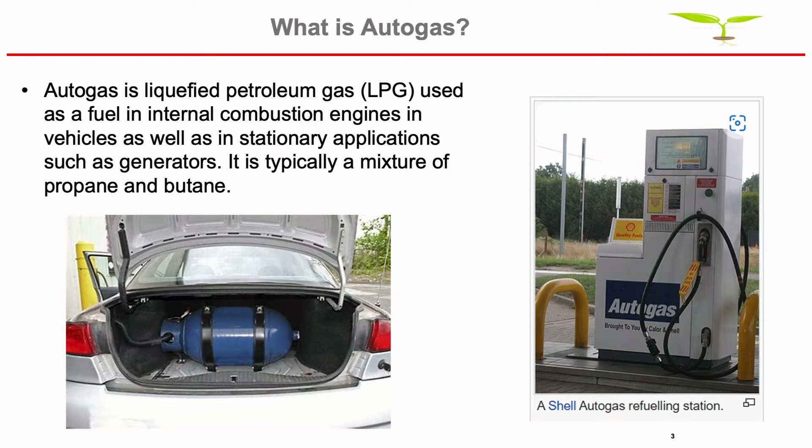It's not autogas. Autogas is simply use of LPG, no matter the ratio, whether it's 100% butane, 100% propane, or some mix, it doesn't really matter. The important thing is that you're using LPG as your automotive fuel. In Nigeria here, I think our spec is 70-30. So that's 70% butane, 30% propane max. Although I know there's quite a bit of violation around, people are not following that prescription. Next slide, please.

In Nigeria here, we have a very peculiar situation. We haven't quite gone the autogas way. So there is a bit more CNG dispensing infrastructure than autogas, and I will speak to that. Next slide, please. So I did say that the share of autogas in the transportation fuel mix is rapidly growing.

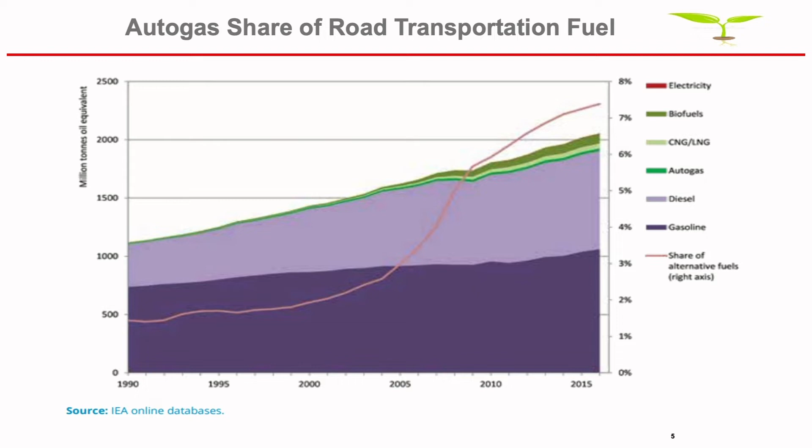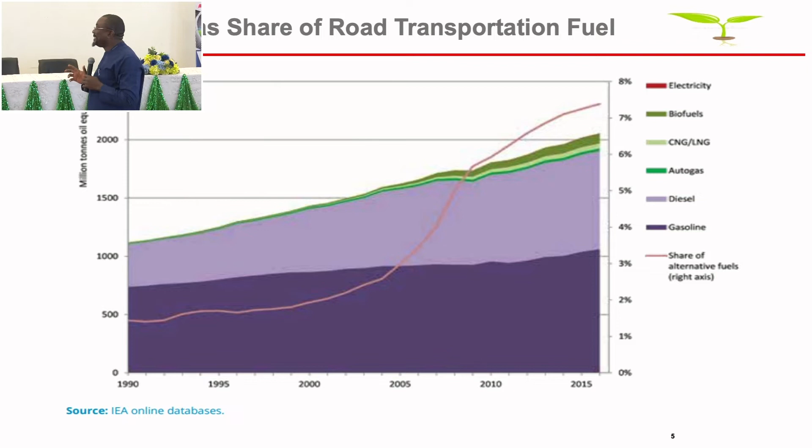If you look at that red line, that's what it shows. You can see that electric vehicles don't quite show, because there's so much talk about EVs, right? The adoption rate is still... the share of alternative fuels was about 7.5% globally in the entire mix. And it's grown faster than what is shown here. So the question is, should we get on it or should we wait, right? But I will show the reasons why we need to move on.

Next slide, please. So why should we adopt in Nigeria? Our gas is rich. Everybody understands what a rich gas is. So wet rich gas is available locally. The subsidies on petrol are becoming clearly unsustainable. The only way to reduce subsidies really and make the pain minimal is to gradually switch from PMS to some gas, whether it's CNG or autogas. Any other step you take will have a huge shock on the system.

So our expectation is that the Nigerian gas expansion program will drive a gradual transition from PMS to autogas, at least in the near term, to not just reduce the subsidy, but to minimize the shock, the impact a complete deregulation of the sector will have on the economy. It is very key that we do that.

The PMS supply and distribution challenges we face, if you think about Abuja in the last couple of months, think of Lagos today, we do have scarcity, right? And it is because we are hugely dependent on PMS. So when there is a shock or a break in that transmission, we feel it so much. Now, if you flip the coin and assume you had a 50-50 split between autogas and PMS, we would not see the queues we see today.

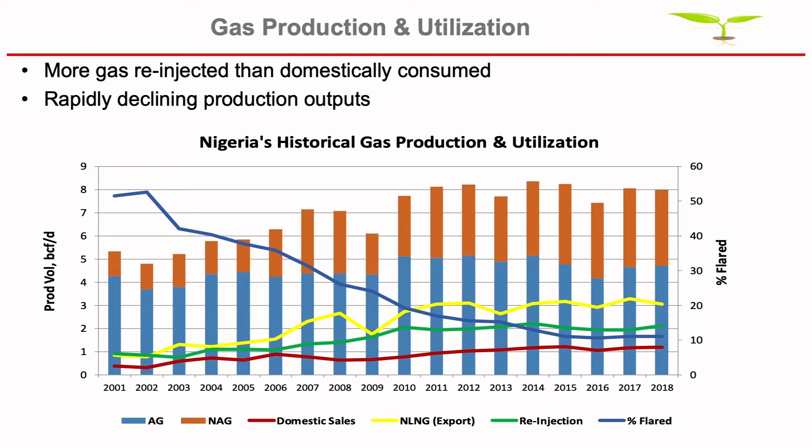And I tell you what, pipeline quality gas is not supposed to be liquids rich, because that creates flow assurance issues in the pipeline. We load up the lines with liquids. So that has a significant cost to our operations as well. So there's a whole lot that can be done to take advantage of this resource base and relieve us from depending so much on PMS. Next slide, please.

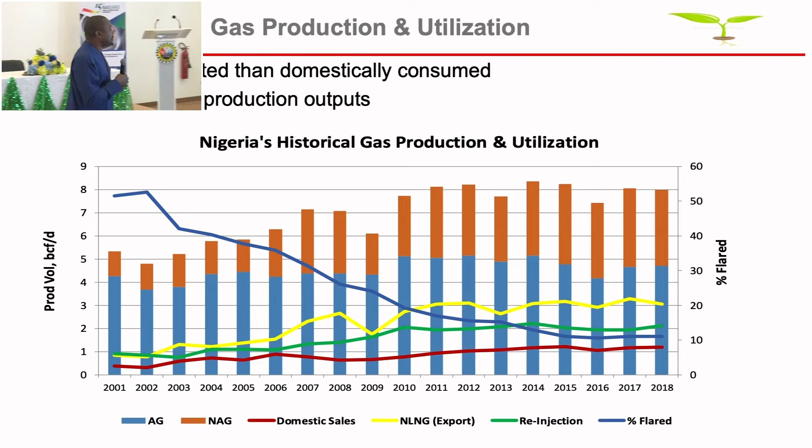So what's the supply situation? Today, we're doing probably 50-50. If you look at the average since 2021, it's about a 50-50 split between imported and locally produced. Right now we get about 350,000 metric tons from NLNG. And then the other ones are small producers. The BRT NGL produces, Greenville does some. The PNG, NPDC Oredo does. I think Zenergy does as well, but they are very small contributors to the mix.

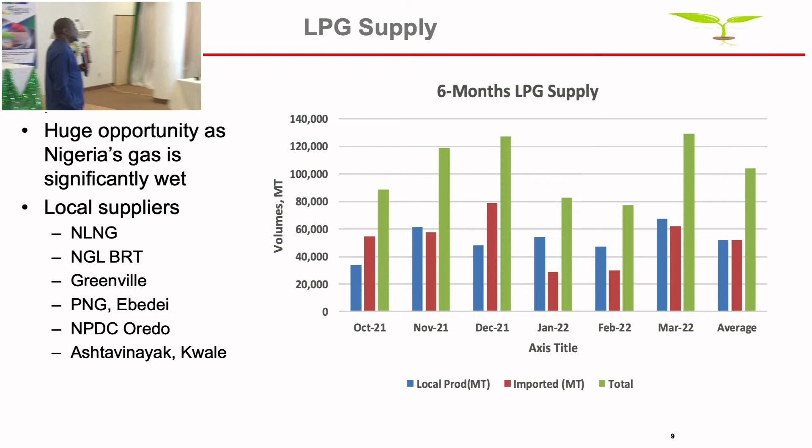Okay. I've been told about time, I think it's Prof that caused it. Shouldn't walk in and cut my time.

Okay, so the important thing is there's opportunity here to increase local production, and that will help as we go through the adoption. Next slide, please.

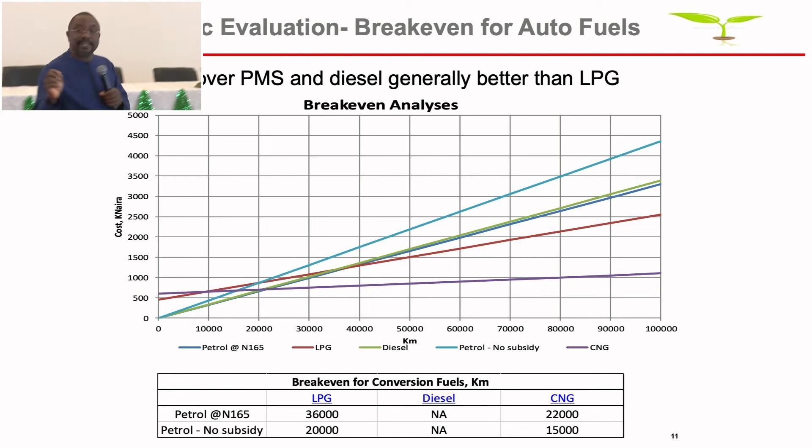Next, please. So these are the numbers. So if you look at this, I'm using the break-even distance. Clearly, CNG gives you a better break-even distance over LPG and PMS, but LPG gives you far better, even better than subsidized petrol and unsubsidized petrol. So there's a clear advantage in switching from PMS to LPG, and if you can, to CNG, the advantage is even more, right? But like I said, the CNG distribution infrastructure is at its infancy. So if we're in a hurry as a country, we need to switch quickly to LPG, right? That's your fastest way to reduce your fuel importation volumes.

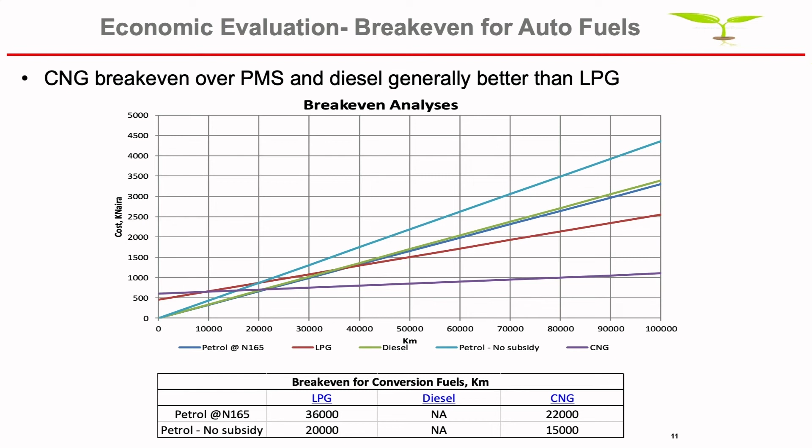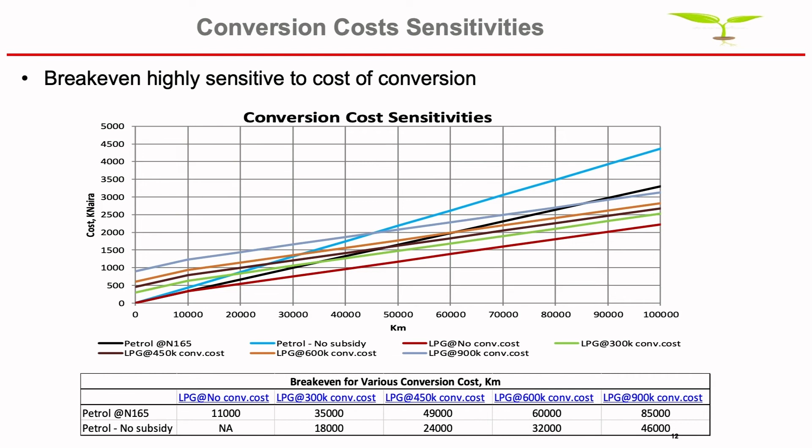Next slide, please. So I looked at conversion cost sensitivities. Right now, the NGEP, they are charging about 300K per conversion. And this is normal vehicles, right? If you did 300K, you're looking at 35,000 kilometers. That's if you're looking at regulated fuel price at 165. Now, if you look at the fuel without subsidy, it's only about 18,000 kilometers. So there's an advantage there.

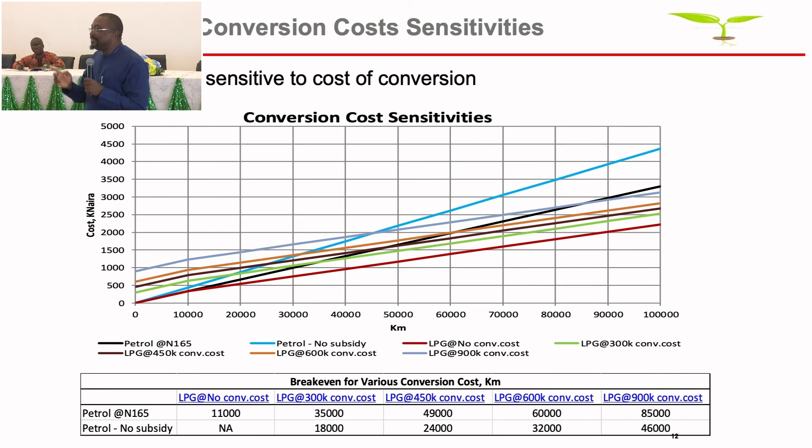So one message this tells you is that the subsidy regime, the regulated price regime, is a disincentive to conversion, right? So if we intend to make conversion attractive, we actually need to deregulate fuel prices. So that's an important message there. Okay, next please. My time is almost done.

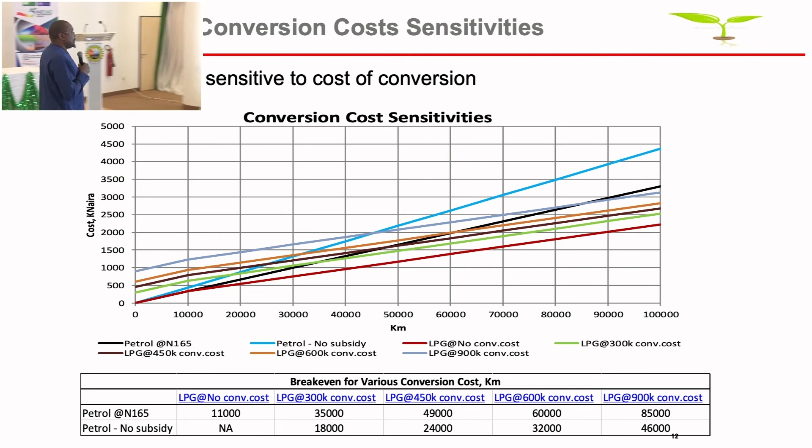So what's happening to LPG price domestically? There are challenges. Like I did say, we are producing about 50% and we're importing. The problem is even the 50% produced here is benchmarked to the Mont Belvieu price, which is an international benchmark. So even when it sells to you locally, you're essentially paying international prices for it. And all the small producers are doing the same thing. So at all times, the prices will reflect the international prices. However, I believe that when we increase domestic production, we will get to a competitive market where there might be reductions in that price.

The other thing to note is that if you look at this price, we're looking at almost above 400 naira per kg of LPG. About 48% of that is actually not commodity cost. So there's a significant infrastructure bottleneck that we need to work on to reduce that price. So there's a lot of add-ons that need to be accounted for. Next, please. So I talked about viability of conversion increasing. Okay. So if LPG price, if we are able to get it down, of course, it becomes a lot more viable to convert. Next slide.

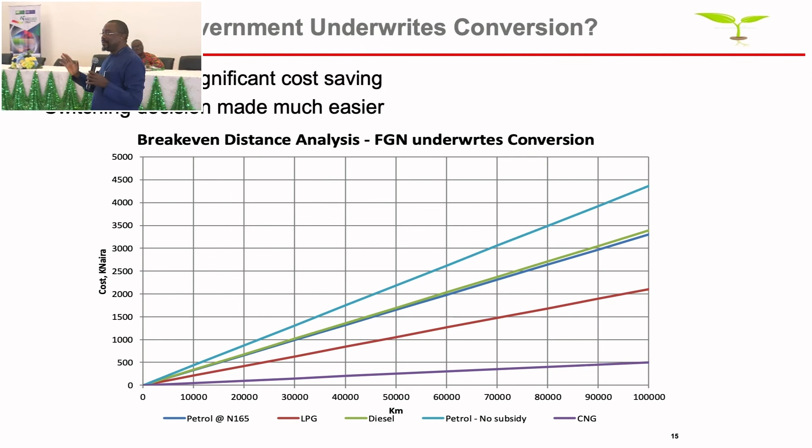So what will happen if government decides to underwrite the cost of conversion? It becomes even better. That's the message, right? So if we can find a scheme, not driven by bureaucrats, that allows the government to pay for the cost of conversion, all of us will go and convert immediately, because really, the case is so clear. Next, please.

Environment, what does this do? Emissions. So this is a study done by some guys in 2009. It shows that there are significant environmental benefits burning LPG rather than PMS. And the numbers are there. And I think I will wrap up. Next slide, please.

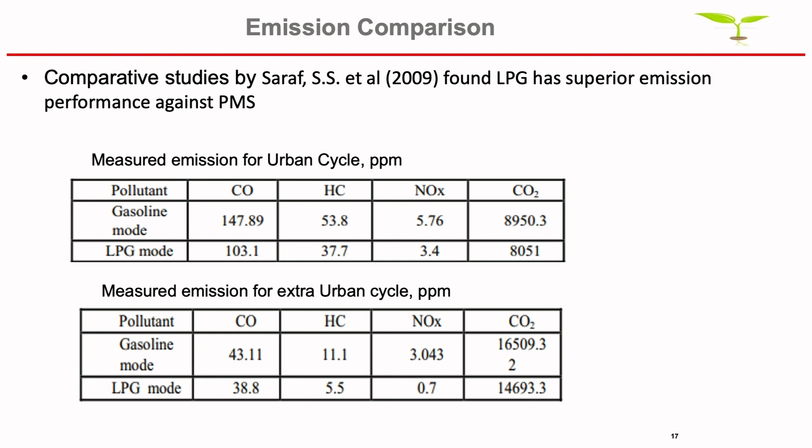So, LPG has several benefits. It's low cost, it can be locally produced, it helps us eliminate PMS subsidies, safer for the environment. But to make conversion very attractive, PMS subsidies need to go. Government needs to look at a scheme, maybe a tax credit scheme like is done in Europe, that will allow them to subsidize conversion costs. And then, of course, we need to work at attracting investment in the LPG production space.

Autogas conversion will indeed be beneficial to Nigeria, but we need to design a program. I'm not clear what the Nigerian gas expansion program is doing, but we need a program that everybody understands, and we can roll that out. And hopefully it will be private sector driven, not something that some bureaucrats will be driving.